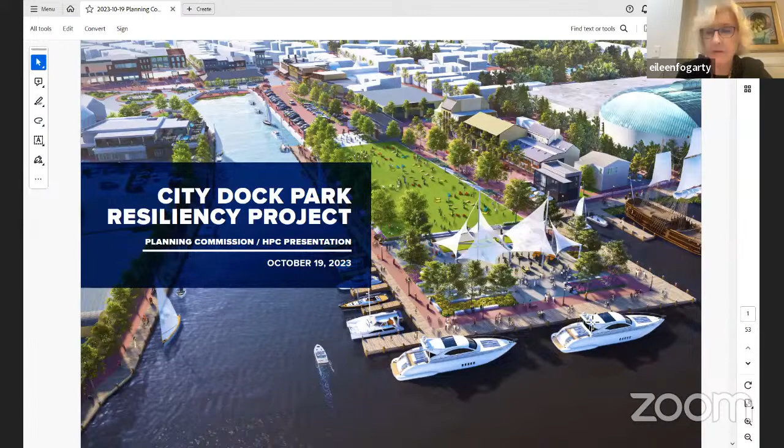So this evening, what we would like to share, you all know the tremendous success we've had with Hillman Garage coming in ahead of schedule. But at the same time, Burr Vogel was coordinating intensely with the Naval Academy and the Resiliency Authority to bring forward a completely integrated resilient system. The City Dock Park design, we received dozens and dozens of comments this winter and spring, and what you will see now is the incorporation of all those comments in the final design. You will also see the kickoff for the Maritime Welcome Center and the Prince George Street conceptual designs. Again, both very early, very conceptual, and we need your thoughts and direction.

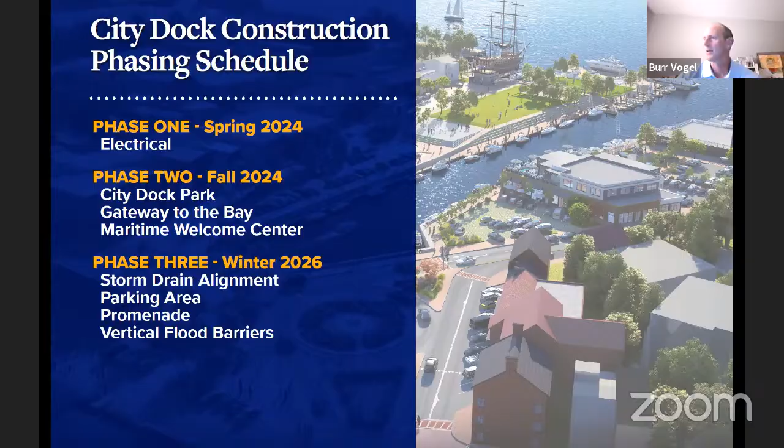Budget update since the last time we talked: the project has grown a bit in cost as we've added some very important items. One is to bring some of the overhead electrical lines underground from the Harbor Master building up to Dock Street, up Pinkney Street to the Shiplap House.

We're also going to be putting flood barriers on the compromised south side of Ego Alley, putting that flood protection system right at the waterfront. All told, we're looking at about an $85 million project, and we're pretty close on funding, provided we get approval from FEMA for a $32 million grant. Next slide.

That's back to you, Eileen. This is the mayor, Mr. Mayor, can you join us now? Because this is your slide.

All right, thank you so much. Sorry about the technical difficulties. It's an honor to be with you. Firstly, thank you for all the work you do and all the volunteer hours you put into this job. You clearly love your city, so thank you.

We are on the cusp of something historic, on the cusp of something beautiful. I believe we all want the same thing. I don't think there's a lot of difference between what any of us want for City Dock. We all believe there's a better use for the waterfront than a parking lot. We all know the water is coming, we know it's heating up and rising. We just saw it in the boat show, on Saturday the boat show flooded. Two weeks before that, I was down on the waterfront with the governor, and City Dock flooded again. We don't really have a choice here. We have to act.

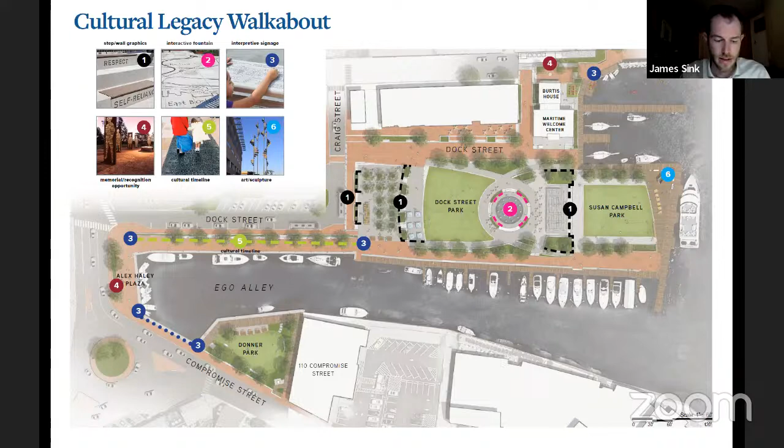Yes, thank you, Eileen. Can everyone hear me all right? One of the things Chris always points out when he shares his piece on this is that there was a moment during the process of the City Dock Action Committee where it was thought that cultural legacy would have to be implemented and interpreted in a singular moment as part of this project, as part of this park. And the point we've come to is actually a cultural legacy fabric, as Eileen referenced, that is spread throughout the park. We think this is going to allow the park to engage people of all different backgrounds and of all different ages on various levels. So we're going to get into that in a little more detail now on the next slide.

So we start here at the end of Ego Alley at what we're calling Alex Haley Plaza. This is the location where the Alex Haley statue will be moved about 15 to 20 feet from where he sits today, there at the number 4 in that top right image. The story wall will be preserved along Compromise Street. So it's at this point where really the experience of cultural legacy at City Dock begins, and Alex Haley's vision for reconciliation, healing, and honoring cultural heritage of all people will continue to set the tone for how people experience cultural legacy in the park.

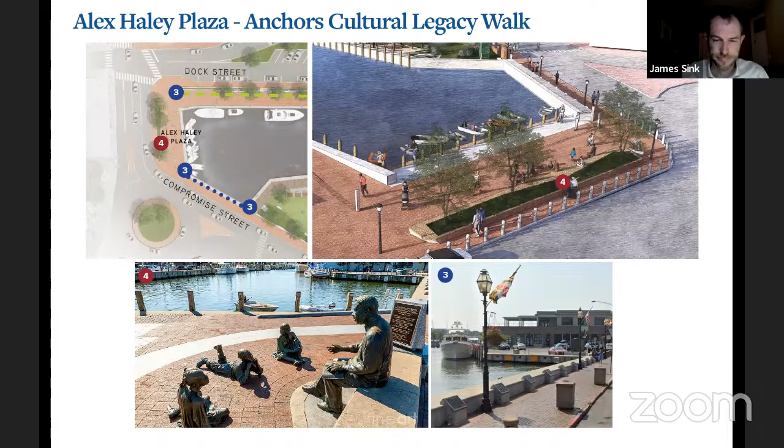Next to Alex Haley Plaza is the new tree-lined promenade, which will include a timeline recognizing the arrivals as well as important events in the history of various groups of people that have called Annapolis home. The beginning and the end of the timeline will be marked with signage similar to the photos on the right-hand side. There are also images there of what in-ground timelines and interpretive panels might look like, as we've seen them installed on other projects.

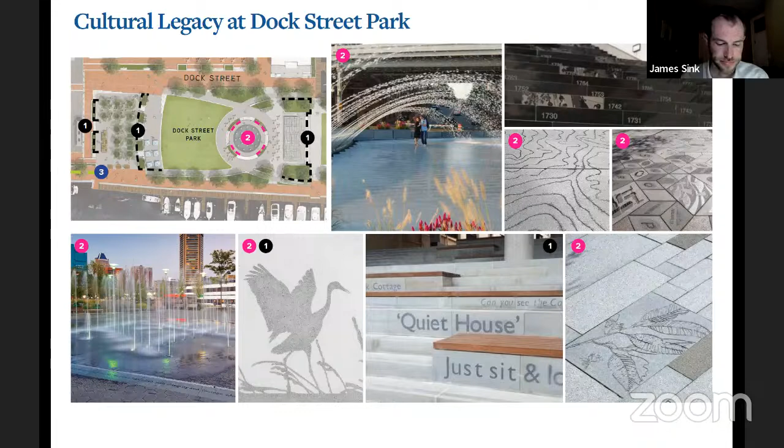The terminus of City Dock, as we all know, is Susan Campbell Park, and we're proposing that it be anchored by a commissioned piece of sculpture, which might interpret Annapolis's relationship with water and with wind. It just has a couple ideas, obviously, for an artist to propose.

And to the north of Susan Campbell Park is the new Maritime Welcome Center and Burtis House, which you'll be hearing more about here shortly. These facilities will serve as a gateway to the bay, and the adjoining Pocket Park will have the opportunity for related historic and interpretive elements to be shown in those locations with the 4 and the 3, which there's some images of interpretive elements and scenes of life on the water in Annapolis there in the top right.

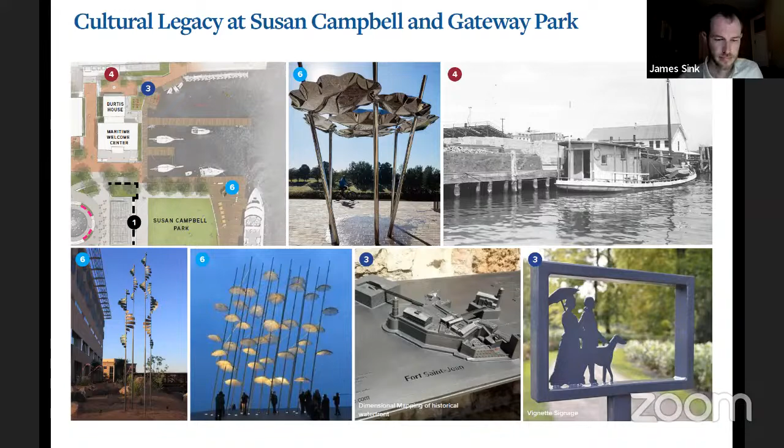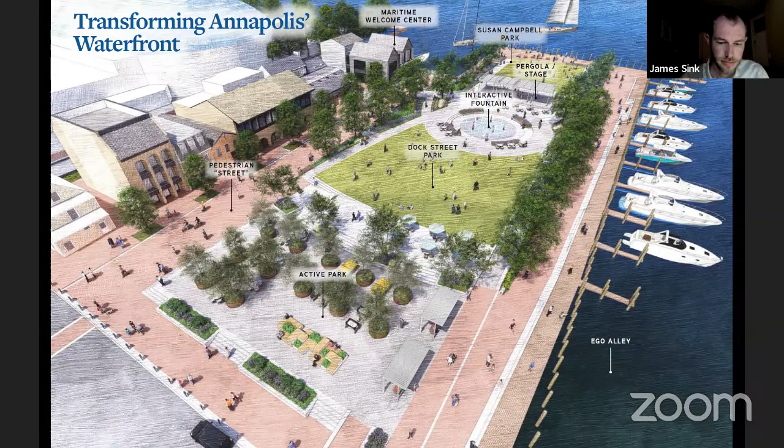So over the years, we've worked with the City Dock Action Committee, various citizen groups. We've met with you all multiple times to understand how people are going to use the new City Dock. And we believe there's going to be something for everyone here.

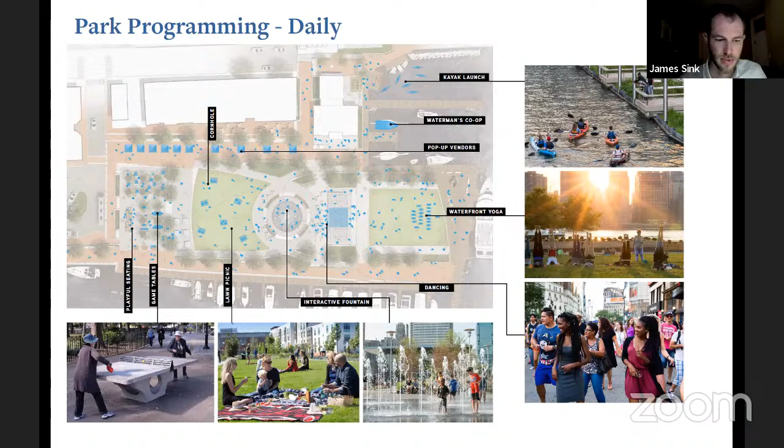Large festivals and events like the boat show, which just occurred, will continue to take place and hopefully thrive at the new City Dock, accommodated as shown in the diagram here. The Songwriters Festival will be able to continue to set up its temporary stage in the Dock Street parking lot, at which point we'll be able to clear out the movable furnishings in the active park for festival goers. The air show associated with commencement will have prime viewing from the elevated lawn.

The Kunta Kinte Festival and the St. Patrick's Day events will be able to spread out throughout the park and host activities here. The option for a summer concert series, outdoor theater, or a movie night can all be accommodated in that stage, which can go to the east or to the west. And as we all know, this is going to really be a prime location for looking at fireworks on the 4th of July.

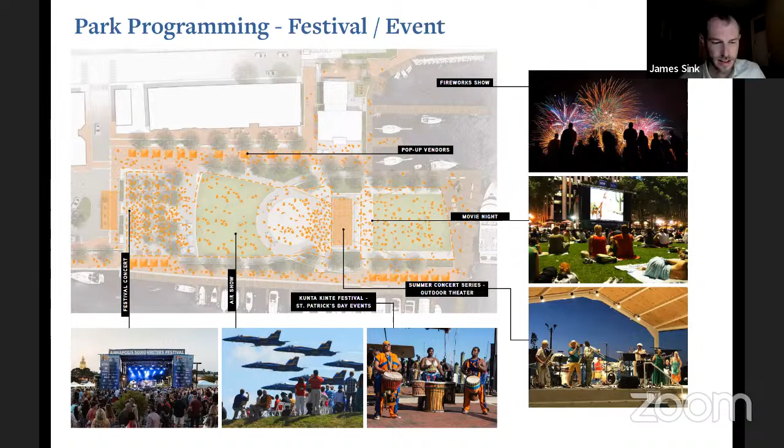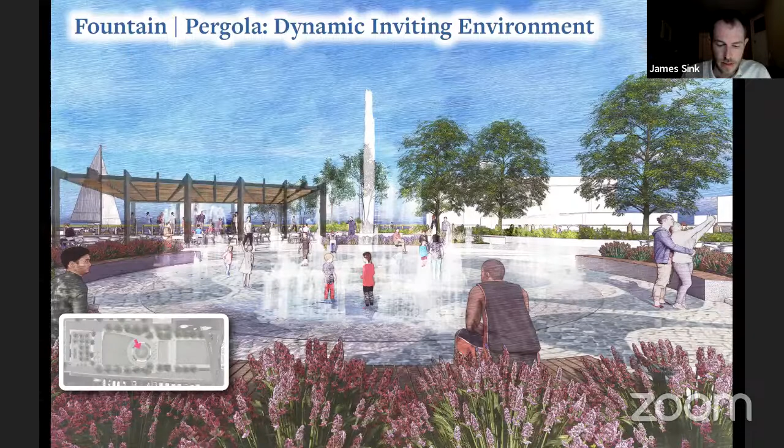Here we see the interactive fountain with the stage and the pergola in the background. You can see it has a generous scale to it. It's going to be able to be enjoyed by a lot of people and right there in proximity to the water.

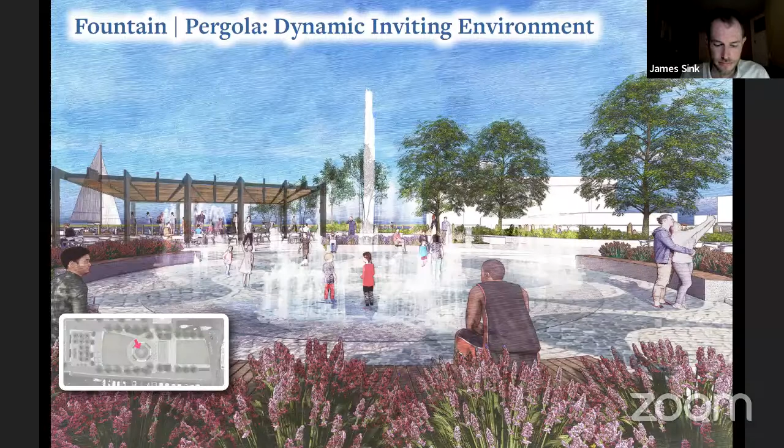Finally, a view looking west along the Ego Alley Promenade. Ego Alley there to the left, and also on the right-hand side, you see one of those portals or ramps that gets you from the promenade up to the Dock Street Park lawn. It's at these gateway points where we like to use the walls to identify some of those obviously entering the park and interpretive elements that we spoke about earlier.

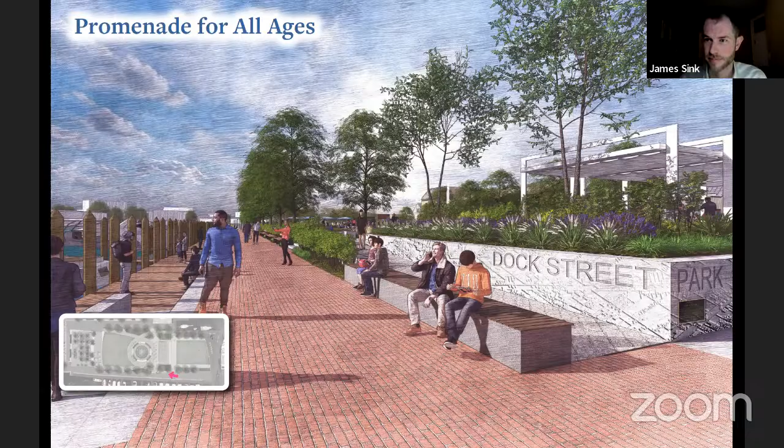So at this point, I'll turn it back over to Eileen, just going to touch on some of the process that we've been through. Thanks so much, James.

When you look at how we got here, I would like the Planning Commission and the Historic Preservation Commission to step back and say, we did it right. We got here through an extremely rigorous planning process. As a planning director for way too many years, I am just so proud. This started with a plan, and it was a consensus plan. We had elements like the conceptual City Dock Park that there was lots of input and feedback on, which then evolved into a more detailed City Dock Park.

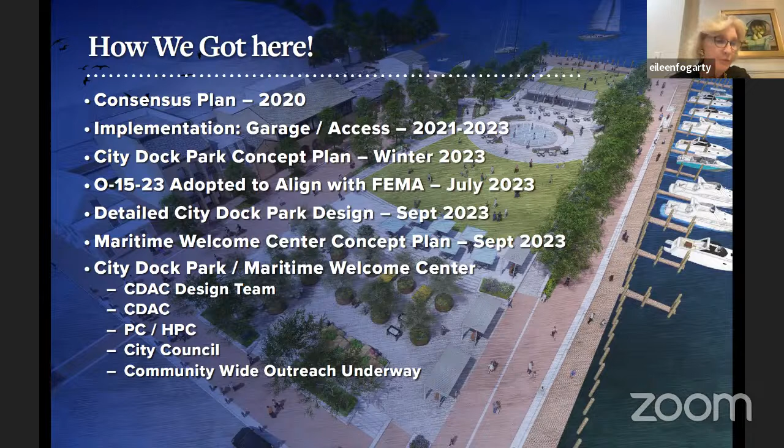There was an ordinance O-15-23, which the Planning Commission and the Council adopted to proceed with the Welcome Center. Now this evening, you have the early conceptual design plans for that Welcome Center. Other groups have seen it: the City Dock Action Committee design team, the City Dock Action Committee, the City Council. But this is just the beginning of the next phase of our planning process with broad-based community outreach.

Perhaps what is most significant about the Maritime Welcome Center is in our City Dock Action Plan, in our Maritime Zoning Strategy of 2021, over and over, we have said as goals and objectives that we will unlock water access for all Annapolitans. This, a welcoming maritime center, does that. It makes those plans a reality. And with that, I'm going to turn this over to Bryce Turner from BCT Architects.

Thank you, Eileen. So I really want to introduce you to the Maritime Welcome Center here. There are a number of, first of all, I'd like to say it's good to see you all.

I hope we can all meet in person, actually. Hold on a second. Maybe next time. Can everybody hear me?

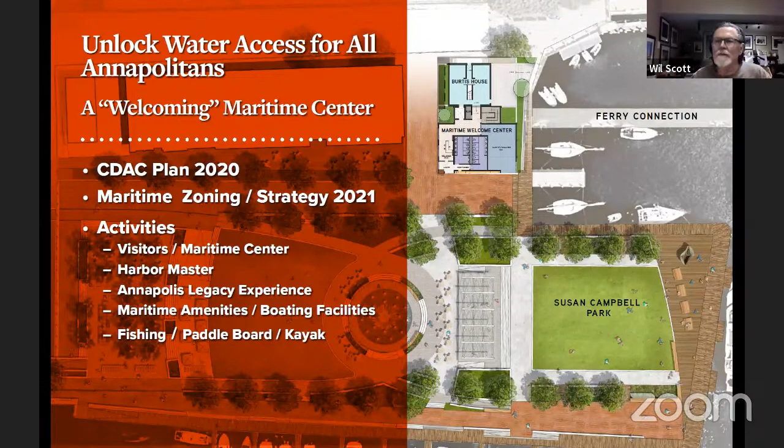The activities that really need to be accommodated here at the Maritime Welcome Center are obviously a visitor's function that Visit Annapolis will take care of, and an important function that is the harbor master, functionally very important to control the traffic here in the harbor in Ego Alley. As well as the opportunity to have some cultural and legacy types of exhibits, maybe a museum. We don't know exactly what all this program will be just yet, but in Burtis and the Maritime Welcome Center, those will be important activities that can happen, along with also some opportunities to access the water.

We know how important that is. It's been repeated many times, but it is important. With private land bordering our waterways, a lot of people don't have the opportunity to access the water for fishing, paddleboarding, kayaking, etc. And we know there's a lot going on at the harbor, but that is the place where the public can really access the water. And it's super important.

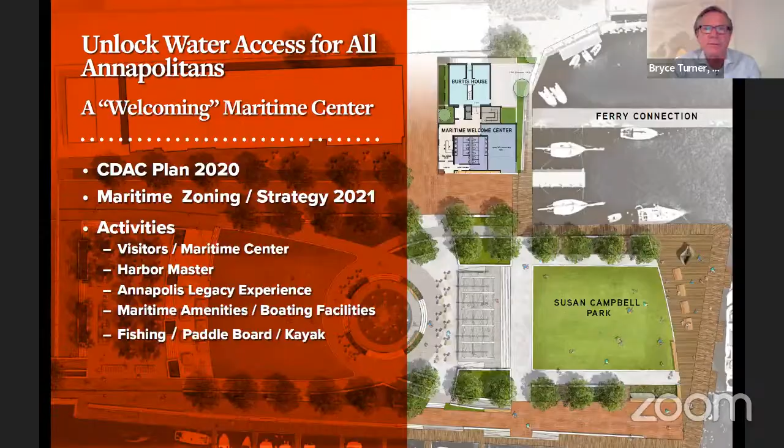So these activities we've talked about are obviously important. And if you'll see in the next slide here, we have created even a floating dock that will give us some additional access to the water.

This is the area we're talking about, shown in the dotted line in the upper right-hand corner, which includes the Prince George Street Park, Gateway Park, and the Burtis House and Maritime Welcome Center. Let's zoom in on that area.

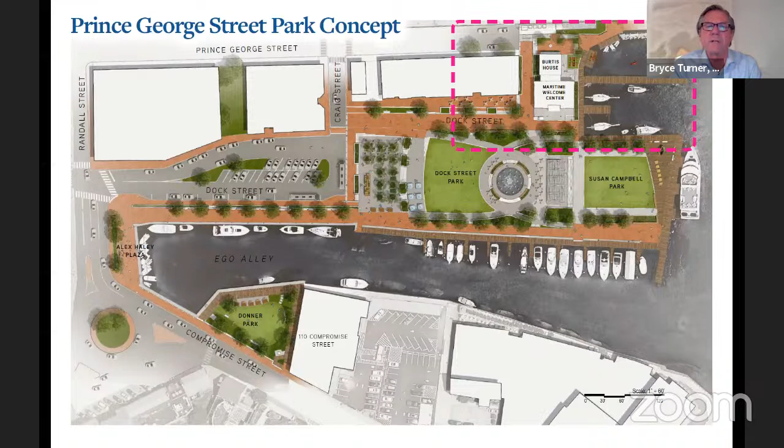Here you can see the brick promenade that is kind of wrapping around the Burtis House and Maritime Welcome Center. Burtis is going to be elevated, as I think you know, to a finished floor elevation of approximately 8.5 feet above sea level. In order for that building to have its contextual relationship to the ground, it really only wants to be up about 18 inches to 2 feet above the adjacent ground plane. So we'll be at about elevation 6.5 with the Prince George Street Park, as well as the promenade on the south side, adjacent to the park.

The area that's currently the parking lot between Latitude 38 and Burtis will be sloped, sloping down to Prince George Street, which is one of the lowest spots we have around City Dock. You can see some of the kayaks. We're creating an educational area there, which we've gotten a lot of input about, even most recently at the City Dock Action Committee meeting, about having a sustainability and environmental education area there. It certainly is an appropriate place to do that. It's also an opportunity maybe to launch kayaks as well.

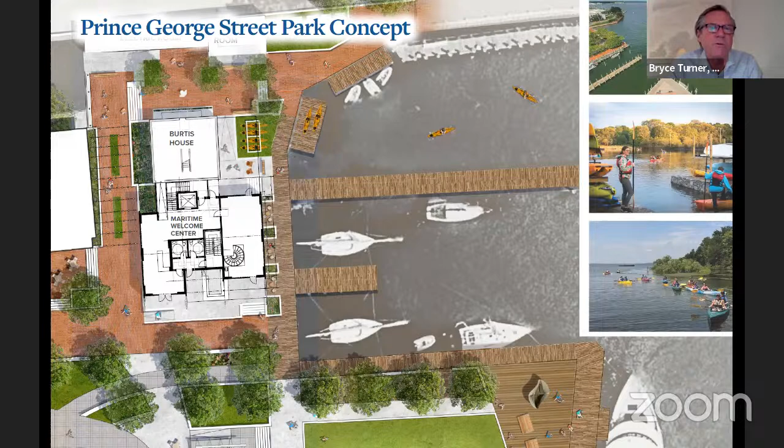Really what I'd like to do, if you can skip ahead please, 2 or 3 slides. I want to talk about the massing before I get into the design of the building.

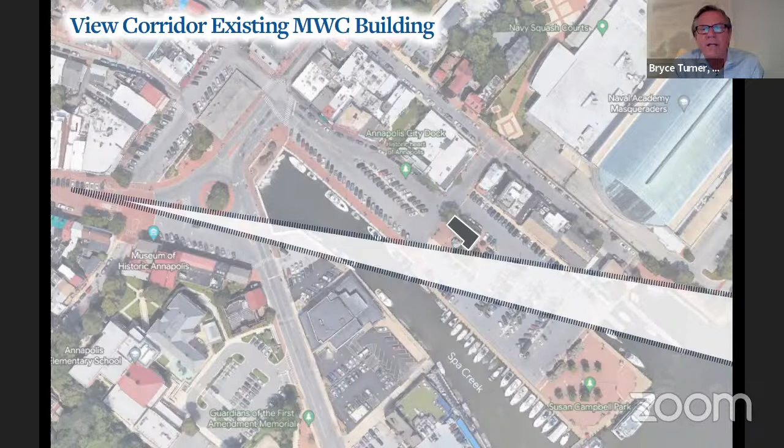We wanted to understand what it means for our new Maritime Welcome Center to have that footprint at City Dock. In this next slide, you'll see that from the foot of Main Street, we do constrict that narrow cone of vision a little bit with the new Maritime Welcome Center.

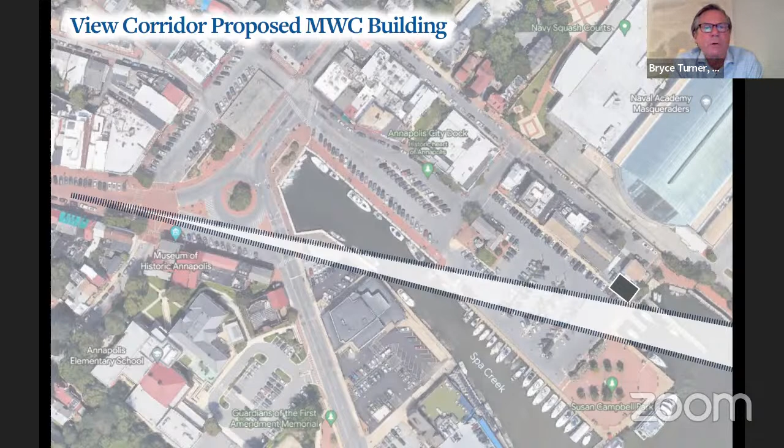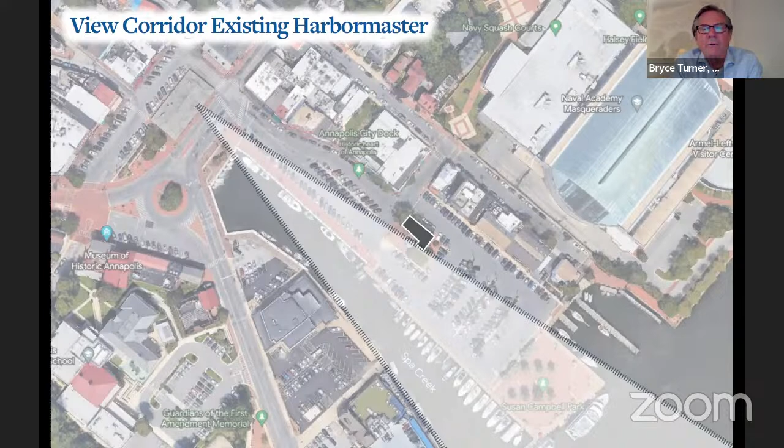But it really opens up significantly when you look at it from the front door of the Market House building. This shows the perspective you get from the Market House, in between the existing Harbor Master building and 110 Compromise, or the hotel. Then in this next slide, you can see the view we get with the new Maritime Welcome Center.

So that view actually increases to some extent, maybe an additional 15% or so. We think that's important.

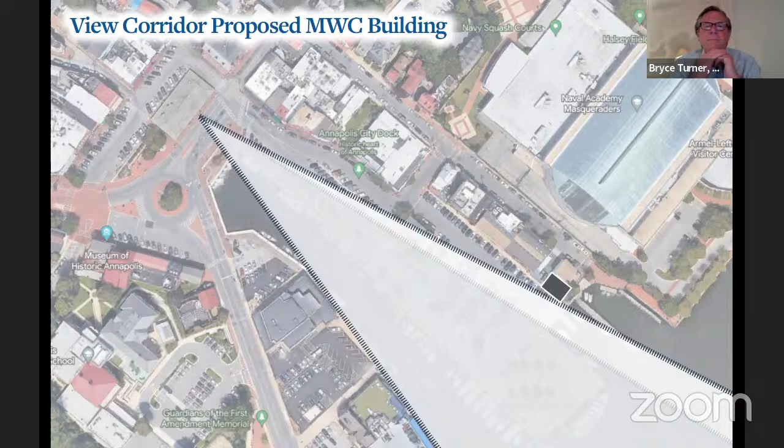So we thought a lot about what is the proper architecture and design character we should be presenting here for the Maritime Welcome Center. Because the scale of the building has to be significantly less than even 32 feet to the ridge, measuring from the ground plane around the building, we really thought it was more appropriate to think about residential scale buildings and homes.

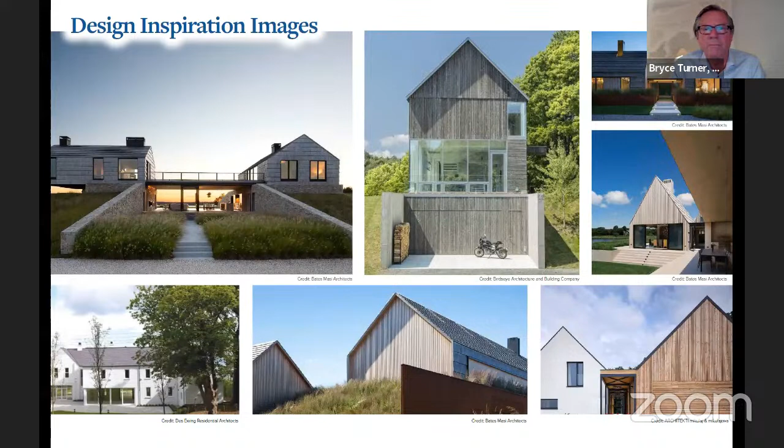We do need some deployable flood barriers to complete our resiliency, but I think it's important what we've been able to do, and to create an amenity for these Dock Street buildings and all of downtown is truly something very historic in nature, and a real game changer, as the mayor mentioned before.

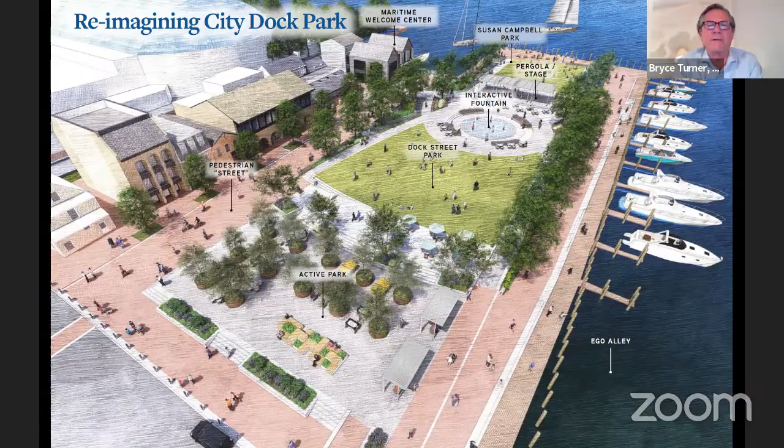This is looking towards the field house at the Naval Academy across Ego Alley. You can see the two shed roofs, the two sheds I like to call them, that we're proposing, that anchor Dock Street. Dock Street is really made up of this tapestry of buildings, various heights, shapes, ins and outs, nothing quite straight or lined up. This building, we think, continues that pattern and anchors Dock Street nicely.

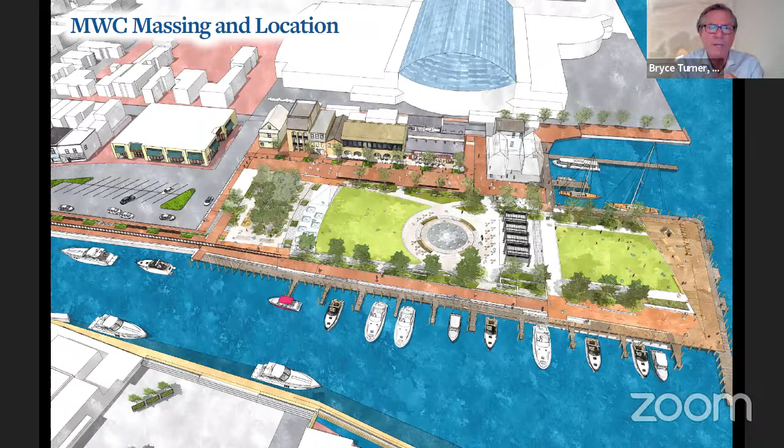And it's a pedestrian woonerf that really connects you to the water from the Market House area and from our small parking area that's left over.

And then looking back towards the city along Dock Street, I think you get a good idea of the breadth of this woonerf that's shown in brick paving here, and the ghosted-in massing of our two shed roofs for the Maritime Welcome Center adjacent to Burtis.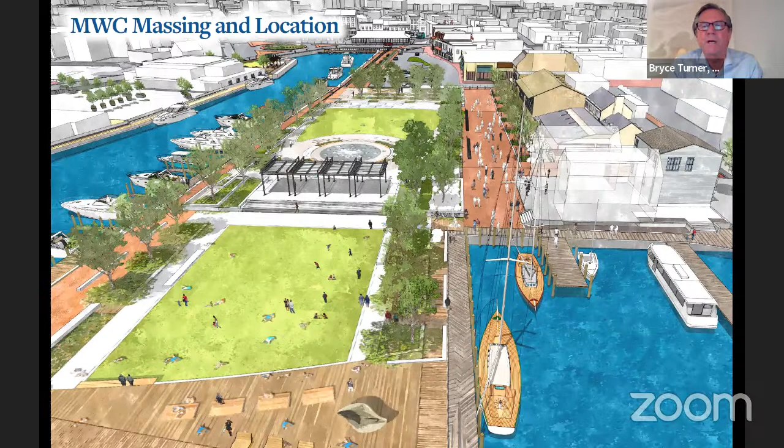Next slide. So we think this is really the right location for this building because it opens up the view corridors and fits with the scale of Burtis and the rest of Prince George Street.

I'll quickly go over the floor plans here, which include the Visit Annapolis component. The major entry into the building will be in this upper left corner, where we think there can be a traffic cop inside the building to direct people to the right locations, whether it's the boaters facilities, cultural legacy museum functions happening in Burtis, the National Park Service, or accessible toilet rooms. Most importantly, we have two stairways and an elevator to create access to the upper level of Burtis and the upper and lower levels of the Maritime Welcome Center.

On the front porch, which I like to call the Waterman's Co-op, the idea is that there's an opportunity for potentially a raw bar, maybe a place you can sit. It can be programmed in different ways - there might be weddings there. It would be an incredible space to occupy that's partially covered during the boat show and other types of activities, and it's accessible.

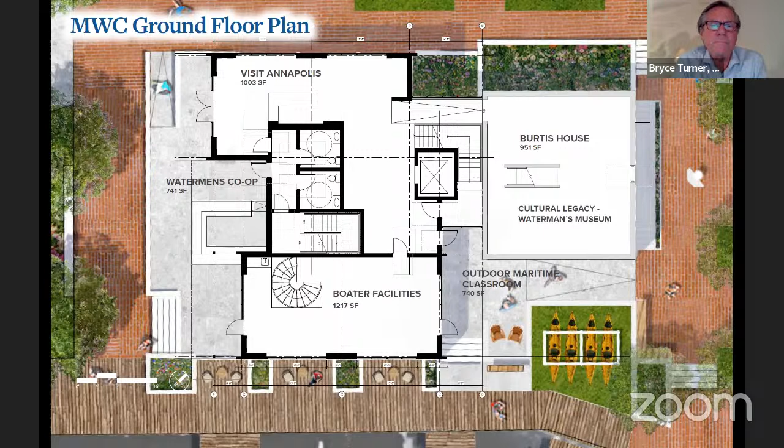Upstairs, we have the very important Harbor Master function, which is about 1,000 square feet, not counting the outdoor balcony. The Harbor Master has access to that entire balcony, as well as the conference suite when it's not being used for some other function. We think it gives them a great view of Spa Creek, even the Severn, and certainly Ego Alley.

Otherwise, we have stair and elevator functions here and one convenience toilet room on this upper level. The upper level of Burtis is still open for some uses, but it would obviously make great flex office space for maritime use, or potentially, if we have the programming for it, some other cultural museum use, which would be fantastic. I could imagine someone renting out this entire suite for a maritime conference or similar type of use.

Next slide, please. And on the lowest level of Burtis, next slide, please.

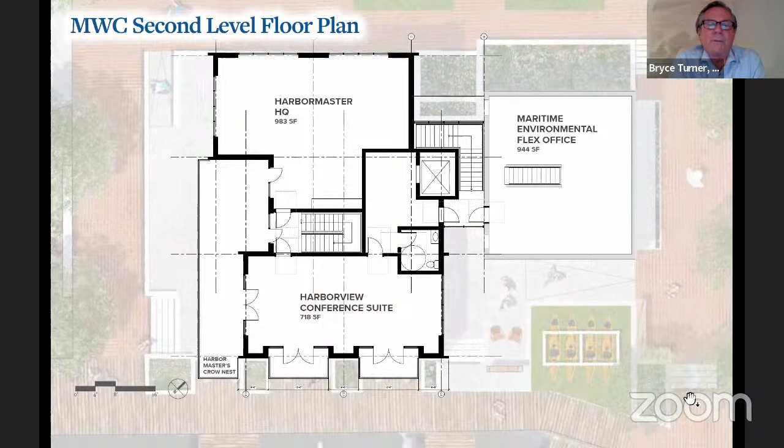On the lowest level, our basement level, we have a dry-proofed area. We're not building a basement under Burtis, but we are building showers and amenity bathroom space for boaters. We also have public restroom facilities - they're so important in these types of spaces. If we want to maintain cleanliness throughout this area, we've got to give people restroom facilities and also storage space.

One of the biggest things we've heard is the lack of storage around City Dock, or for the city in general, for programming uses, whether it be chairs or other accoutrements. So the idea here is that we can really store some things that are going to be necessary for the various robust programming that will happen at City Dock.

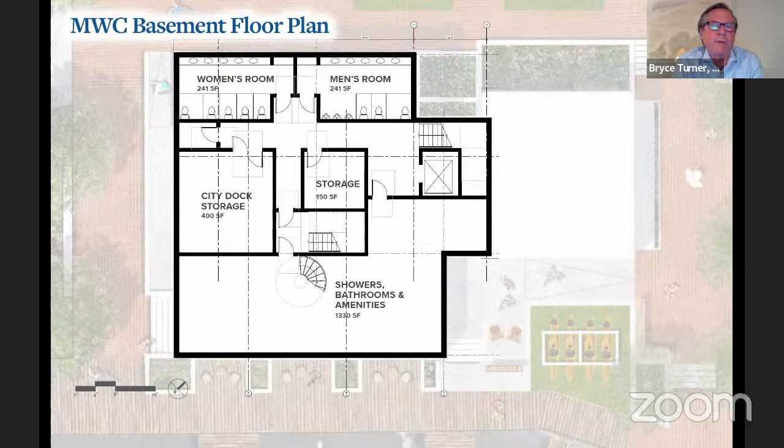So this is a view looking above Susan Campbell Park. You start to get a sense of some of the design we're proposing for the Maritime Welcome Center. You'll notice the two shed roofs, and some of the input we got from our very talented design subcommittee of the City Dock Action Committee was that some pushing and pulling of these shed elements to create a little more variety and diversity was welcomed. An opportunity to create a balcony off of that space was important, as well as addressing the waterfront.

Further input that we got - so you'll see our flags and balconies there looking out over the water. Next slide, please.

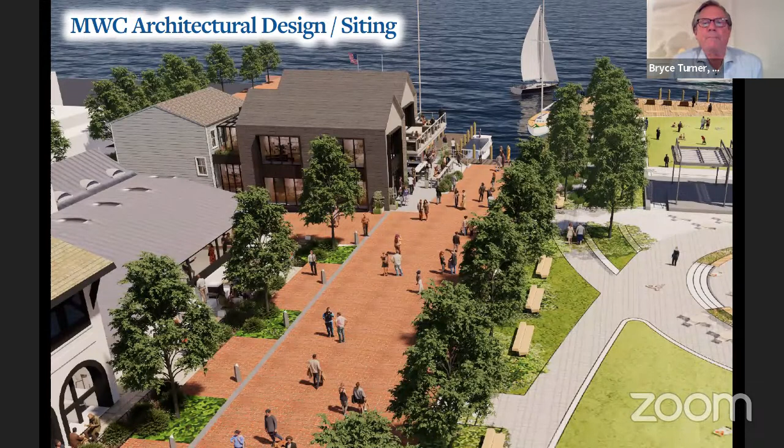And then looking at this from the kind of the market house area, looking out towards the water, you get a sense of how these two shed roofs interact, how it connects to Burtis. And we're really studying how we connect to Burtis in a very sensitive way by using a small glass hyphen.

That connects to Burtis and allows the elevator access and stair access from Burtis. They'll be important as we make it an assembly use. We get more people there than a historic home would have, obviously. So we have to have new stairs as well as an elevator for the upper level of Burtis.

The interaction with the other buildings on Dock Street, I think it anchors Dock Street nicely here. And then we start to transition our grade down towards the water a bit, as you can see, but it's a very generous Woonerf and a nice area that can be used and programmed as well, in addition to the Green Park.

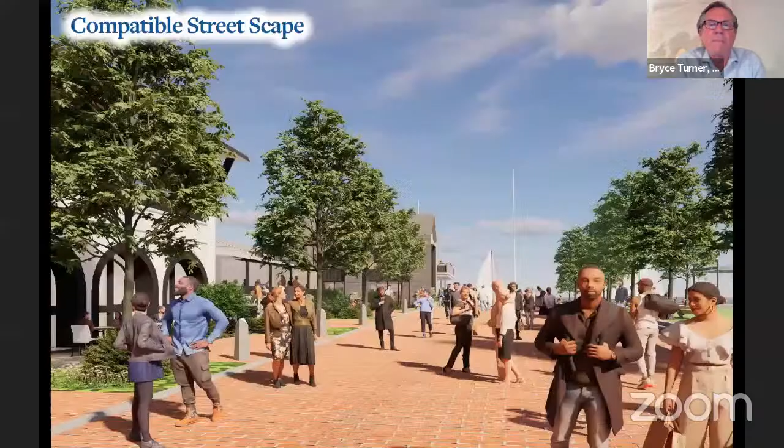And I want to talk a little bit about the materials. This is obviously at kind of eye level, looking down towards the water. Again, next slide.

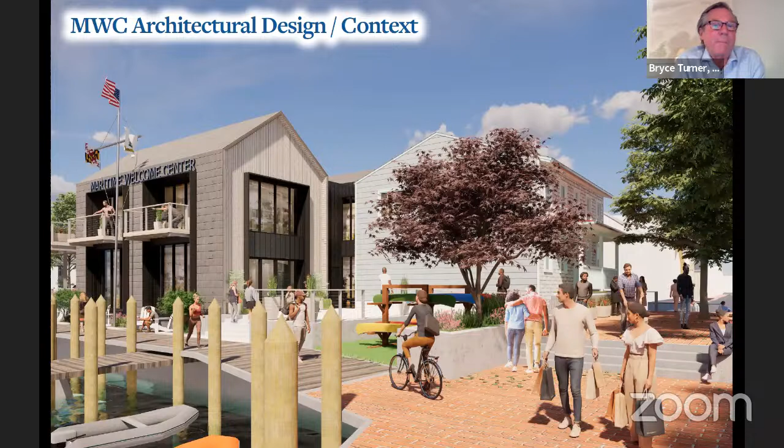And then this is the water side of the Maritime Welcome Center. And, you know, in our schematic design here, we've located flags, the Annapolis flag, the American flag, and the Maryland flag, the balconies that project out over the water.

Similarities in the shed roofs with the Burtis house, the materials we're proposing are kind of a cedar shingle roof and siding that is somewhat continuous. It's a bit more of a modern motif, obviously a contemporary motif, and vertical siding, the lighter color that you see there around the window.

And then the windows themselves probably be metal and kind of a bronze finish. And we think that it's soft and in contrast to Burtis with its horizontal wood siding, and it still has some of that diversity that the City Dock architecture has always had.

And again, you see just between the two where you get this glass hyphen piece, I call it, which is the connection between the two buildings for vertical transportation. Prince George Street Park on the right, which is elevated from its current location, and Burtis is sitting there nicely and hopefully restored someday soon.

Sitting on top of Prince George Park there, and as it transitions down to the rest of Prince George Street. Next slide.

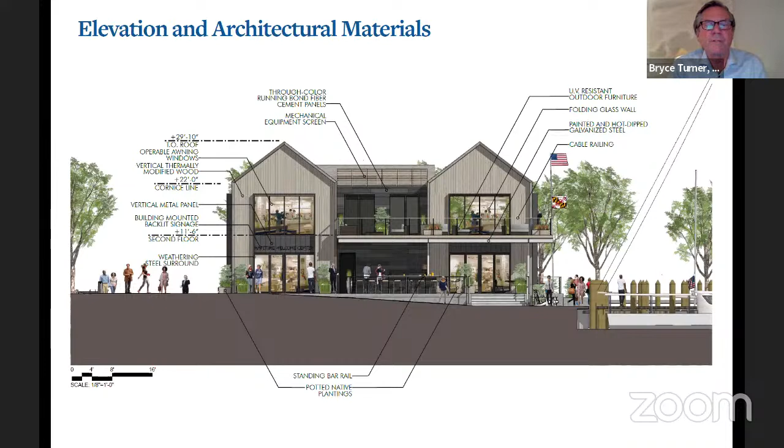for this. Next slide, please. And when you look at this in context, you can again see how we're measuring this with the height to the cornice line, which is our most challenging, tightest dimension to work with, and then the top of the ridge roof, which is achievable because we're using two shed roofs rather than one.

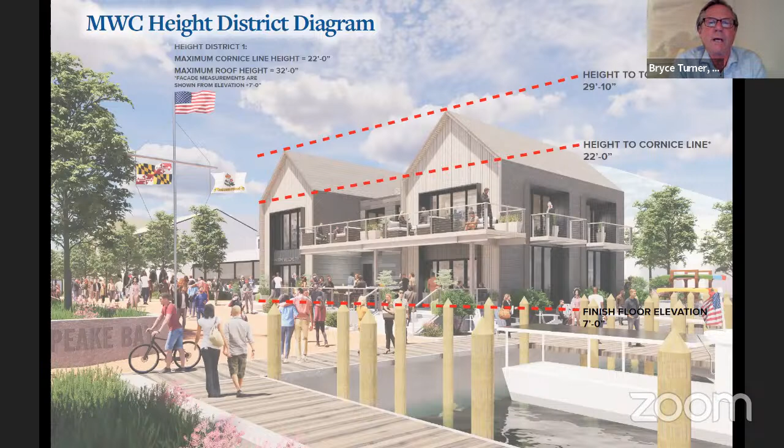Next slide. And then this is the elevation of Dock Street, all the way from 4 Dock Street there on the left to the Maritime Welcome Center.

The diversity of heights, as I mentioned, this is an elevation view, so the field house tends to loom quite large, but we won't be the tallest building by any means on Dock Street, even though we are starting at a higher elevation because of the new building code requirements for finished floor to be 7 feet above sea level.

I think it complements what's there. We've got a variety of things going on, and I'm convinced that these structures will be improved once we build this new amenity next to them as well.

But we're really pleased with this building. It's a relatively petite building, and I think it fits in nicely with the character of Dock Street, but it's also something that I think we can be happy with in terms of the contemporary times in which it's built. Next slide.

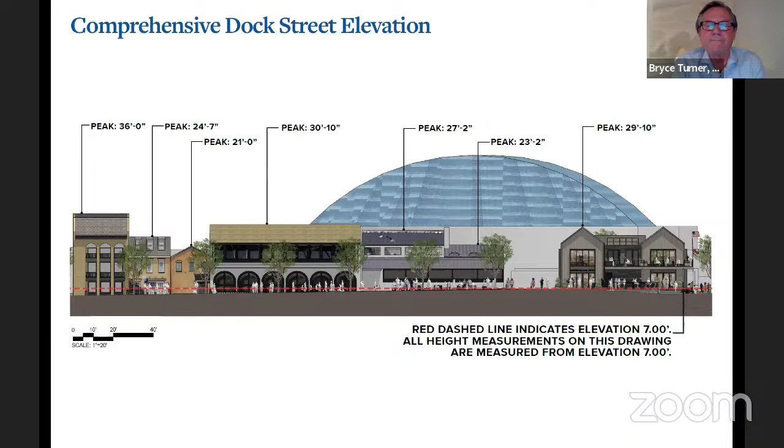So this is a view from the corner, rendered a bit. You can see our flags and signage facing the water. This is how we'll anchor Dock Street with the Maritime Welcome Center. Next slide.

Thanks so much, Bryce. Just to wrap up, the next steps for the Planning Commission and HPC: you'll be seeing the site plan for the City Dock Park. Planning Commission hopefully in December, HPC in January.

In terms of the Welcome Center, this broad-based community engagement process will proceed for the next several months, where we'll take direction from both of you this evening, from the council, from the community, and then bring back iterations. Next slide, please. We already had a City Dock Action Committee work session, a good hour where people broke into groups and we got tons of terrific comments.

Some comments were about educational and environmental education, looking for diverse business opportunities while this is being constructed and after, continuing City Dock resiliency all the way around from the Yacht Club to the Naval Academy, bringing back watermen, and having a greater presence for the design on the water itself. These are just a few of dozens and dozens of terrific comments we got.

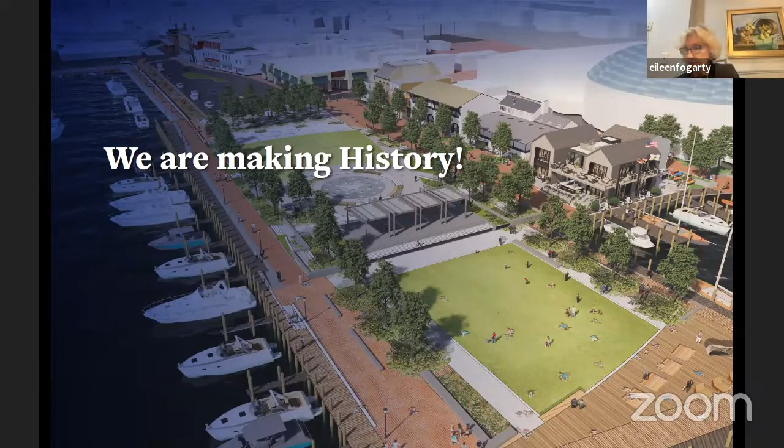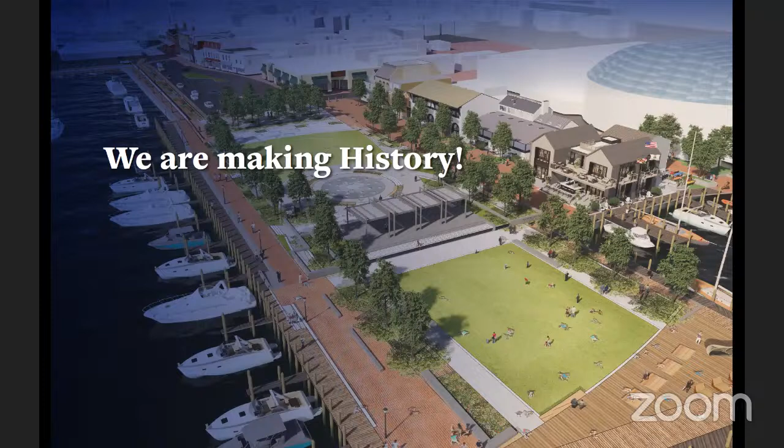Well, thanks Eileen, I appreciate the presentation, and this looks really nice. So I think at this point, let me just open it up first to see if anybody has any questions or clarifying comments, and then I think the best thing to do would be to go around the horn. But let me first see if anybody has any specific questions.

I do, this is Diane. Just a clarifying question: when Burr Vogel showed some slides early in the presentation depicting the flood barrier, it looked like there was still a segment that wasn't included. But then I read a public comment from Carolyn Mitchell, who said she was heartened by Matt Fleming's indication that Fleet Reserve had now signed on to the flood barrier and that we are complete from the Naval Academy to the Yacht Club. Can somebody clarify what, if anything, has happened there and whether we have complete barrier protection now?

Burr: We will have complete barrier protection. What does that mean? We don't now. That's what I was getting at. I think your slide was clear, I don't have a barrier slide in this deck. Okay, can you jump back to that slide? It was like the third slide in your presentation, slide number 4 or so. Okay, yeah, it looks like the Fleet Reserve Club finally is in, I can do that, it's just gonna take a moment.

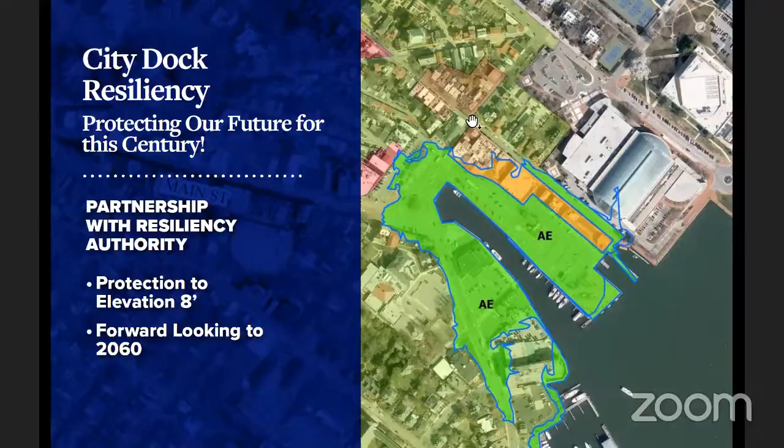Would I be able to share a screen? Yes, absolutely. Okay, let's come back to this one when I'll bring up something that would be a better visual.

You should move on, this will take a second for me to get a file open, unless James wants to do it, but I don't know if he's ready. No, okay, I've got this. Just move on to other questions while I bring up the screen. That's it for me. Yeah.

Well, okay, anybody else? Oh, go ahead, Bob. Can you imagine me not having questions? Never. I only have 9. Let's start off

going back down Dock Street towards the Market House. What's happening with that section where there continues to be parking? Because it looks to me like that horrible sidewalk in front of Mission Barbecue and the ice cream shop and Armadillo's has not been changed, and that the parking lot itself hasn't even been reconfigured.

I will say that I think within 10 years that parking lot is going to disappear when people realize how attractive City Dock Park and everything else being done will be, and how it will increase business, so that those businessmen will finally give up on their 35 parking spaces. But in the meantime, what's happening with that sidewalk and the parking area? That's question number one. Okay, let me ask Madeline to leave the presentation up - this is about 9 slides from the end, a view representing what Bob is asking.

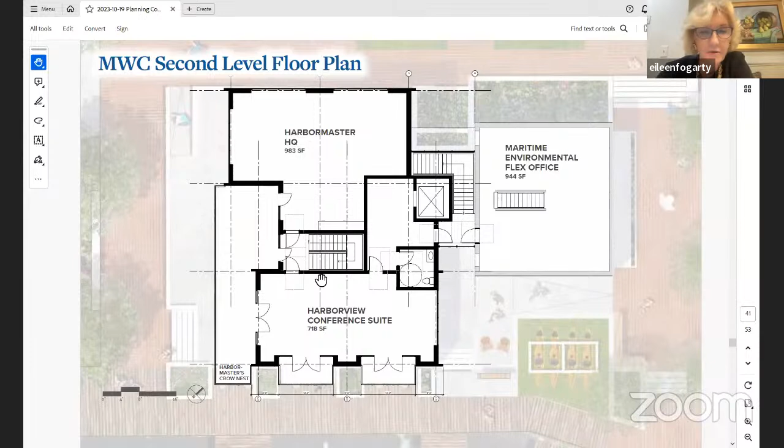And maybe James or I can address that. But Madeline, go forward a few slides, about 5 slides. That one does it, the one you just showed is good enough.

Well, I guess what I would say about that, when we did the consensus plan, this was the great compromise that we made with the business community there, that some parking would remain. In order for there to be any parking, we really had to keep those 2 bays of parking because we've now cut off the rest of the access to Prince George Street, you might say, and from in order for vehicles to turn around.

It's further complicated by 2 other things. One is the boat show. This is the big drop-off spot for the boat show. That active park that James talked about will become the staging and loading area for the boat show, and they're going to have to drop off everything there generally. Goods will be running back and forth via golf carts once they get their boats in place. The other is buses. It's really important that buses can pull up here. There'll be a couple bus parking spaces, and the buses are going to have to turn around at that point to exit. So unfortunately, perhaps the width of that parking area stays the same, and thus the sidewalk remains narrow at Mission Barbecue down there.

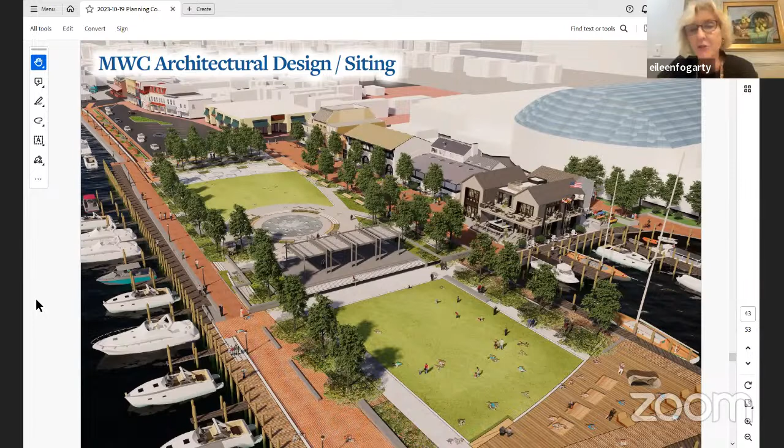And Bob, just so it's clear, that is not part of the scope. I mean, we will do what we can with it, but that is not part of the project - the project actually ends where you see it end. Okay, that's too bad, because that's what people see first. All right, that's the first question.

I'd love to see what you are designing for it, even though it's not technically within the scope. The second question has to do with trees. It's gratifying to see a fair number of trees because, as everybody pointed out, shade's a big issue. But I wonder what kind of accommodations are being made for trees and the inevitable saltwater infiltration that's going to occur. How are you going to protect the root structures of these trees and make it big enough so that the trees actually get big enough to provide shade? What are your plans for that?

James? Yeah, sure, it's a good question. I'd say about 50-60% of the trees are behind the flood barrier, so we're not expecting saltwater infiltration into those rooting areas. And then for the trees that, inevitably during larger floods, would get saltwater inundation, we're selecting species that are tolerant to that.

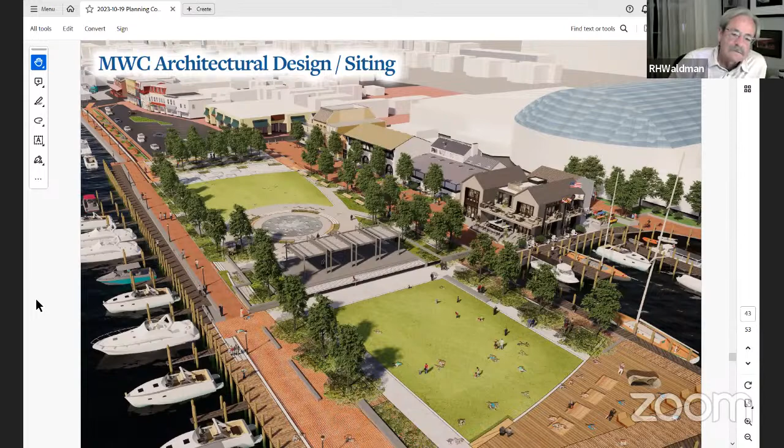Okay, all right, great, if somebody will let me. Yep, you should be able to now. All right, this was the old plan where our flood protection was going to be along Compromise Street. I need to switch over to that window, leave Zoom. Bear with me, something happened to it. I'm not used to doing Zoom, so it's a little funny to me. Okay, here we go.

So yeah, the old plan had flood barriers along Compromise Street, and then we would have to jut through the parking lot here, and then either tie into the Fleet Reserve, where more or less the Fleet Reserve would become part of the flood barriers, or figure out something in front of that.

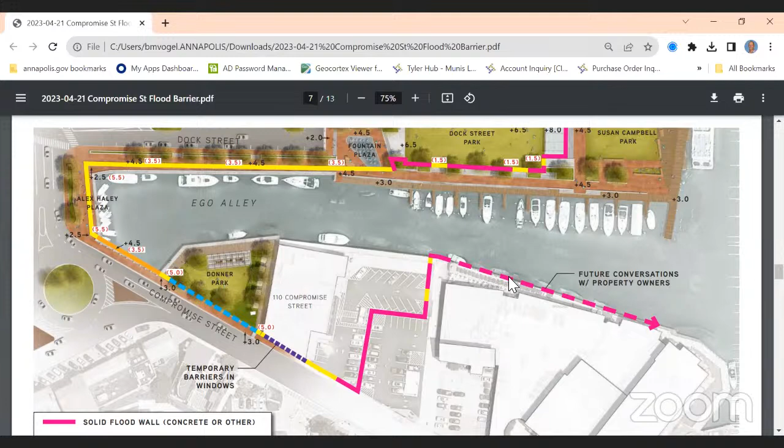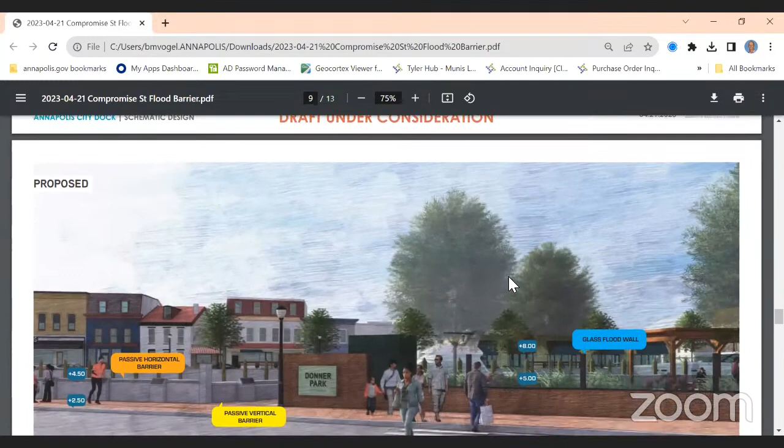What I was talking about on my slide is that what we're going to do now is simply extend the concrete bulkhead that we have here on the northwest end of Ego Alley, all the way down in front of 110 Compromise, through the parking lot, end of Newman Street, and in front of the Fleet Reserve. So I've got that cost budgeted at about $8 million, and I think the project can afford it. And I think it's very important that we do it this way. I'll turn things over to James or Bryce if they want to add any comments, but I'm going to move my screen through some of the other slides James prepared a few months ago to show how bad the original plan was.

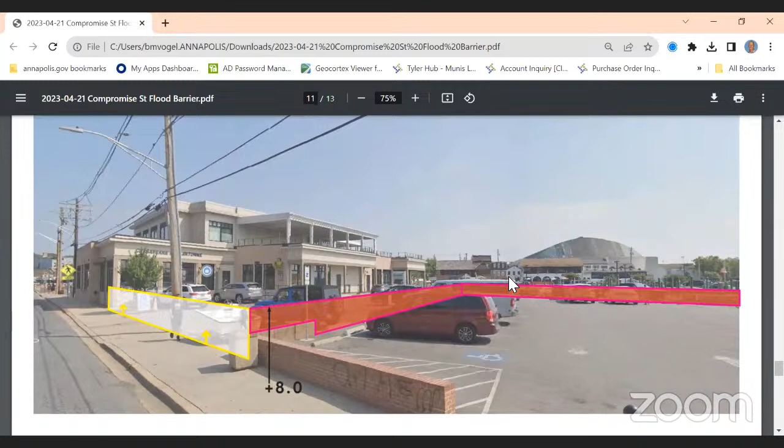The red would be fixed walls. The yellow would be barriers that would have to go up and down to allow cars into the parking lot.

So there you go. Protecting along the water, I think, is very much the right answer. So what's the situation with the hotel?

Well, the hotel's substantially elevated. Its base floor elevation is quite high, so you start thinking about the volume of water it would take to go through the hotel and out the front doors. I think our pumps would handle a decent amount of that, but if not, we might get away with some knee walls in front of the hotel. Just getting us to the Fleet Reserve and up to the hotel is going to provide a tremendous amount of flood protection, getting us almost all the way up to 8 feet.

Okay, what kind of walls are you proposing in front of 110 Compromise and Fleet Reserve? Exactly what we have at the northwest end of Ego Alley: cantilevered sheet pile, concrete cap, and then deployable barriers on top of the concrete cap.

So the concrete is walkable, or benches, help me out here. Is there a walkway on the water side of the wall? Why do you need a walkway? Well, there's walkways on the land side, and the bulkhead is between the water and the pier.

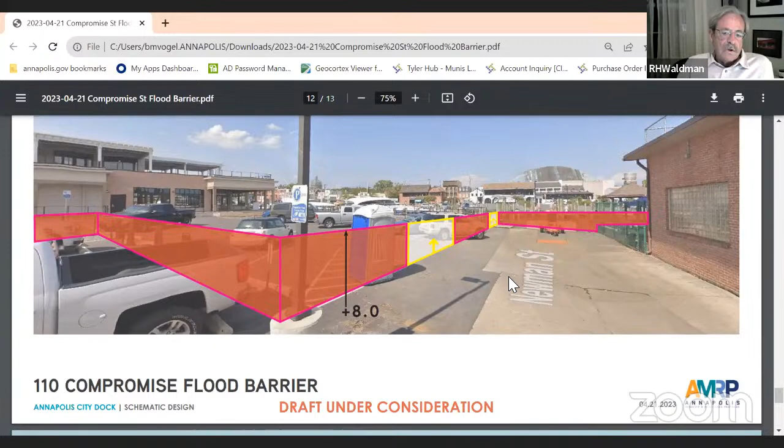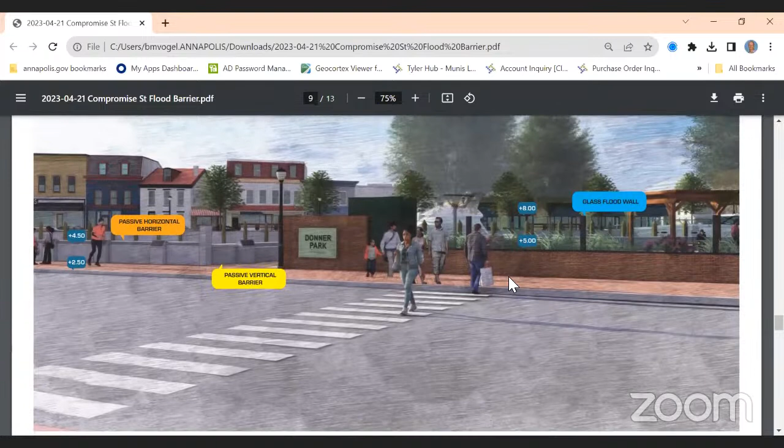Okay, there's an answer. You might be able to see it in one of these pictures. Kind of like this. But that's higher than 2 feet. Not terribly. Okay, all right, so that's what you've got.

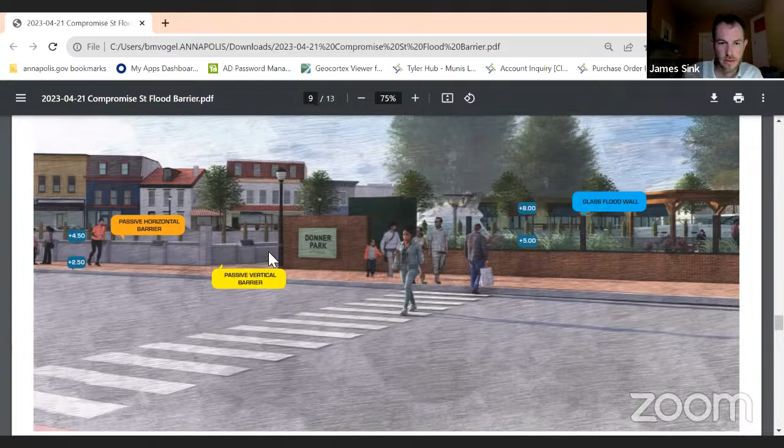You know what might help at some point—I know this is coming late in the design program—it would be great to see even line drawings of what that's going to look like. That would be really helpful. You might get some constructive comments if we could take a look at it at the next meeting, or even before then.

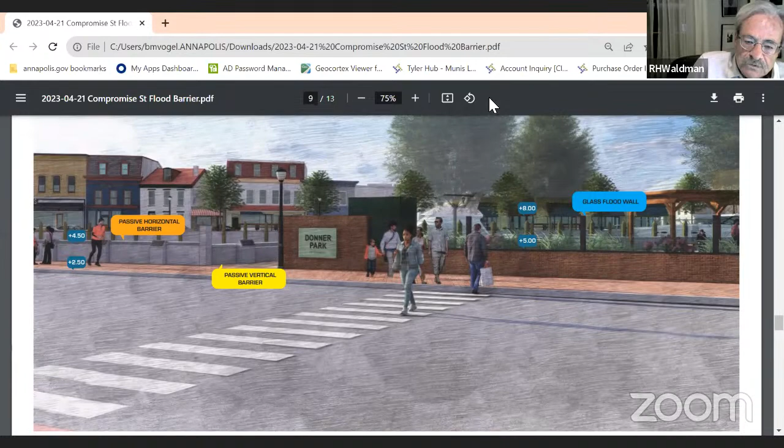So the next question has to do with jumping back over Ego Alley and over towards Gate 0 and the end of Prince George Street. Has there been any thought between the city and the academy about access to the waterfront? Apparently Ms. Johnson said they're going to build a flood wall running pretty much from Prince George down to the point. Would there be any possibility for public access along that walkway?

Zoe, are you here? Yes, I'm still here. We're continuing to have conversations about the look and feel of how the flood wall will tie in with that wall, and potential public access opportunities down there at the end of Prince George Street. So probably more to come on that. We're also trying to figure out exactly how the two projects tie in, both in terms of timing and construction, as well as the more technical aspects.

I do want to compliment you—that little park right on the other side of Gate 0 is really an incredibly attractive park, but it's kind of orphaned, off from anybody really getting access to it.

But it's a very dignified and really nice place to be if one can get there. It would be great to see that continued all the way down. I would encourage you to continue thinking about public access along that bulkhead.